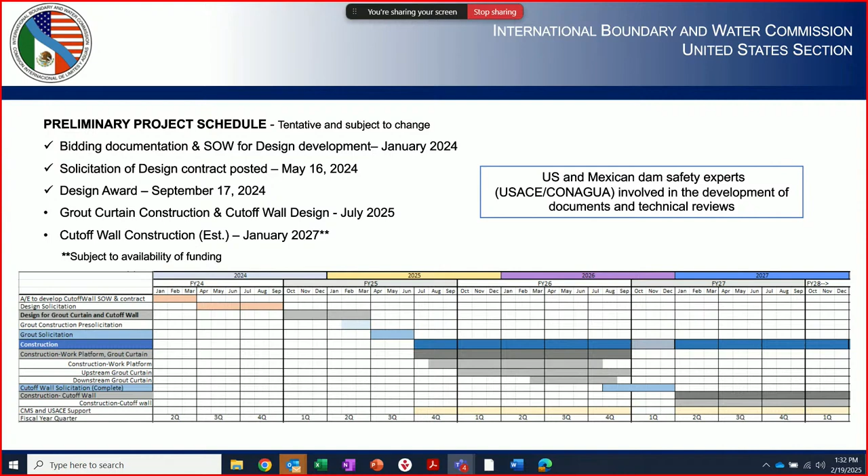How am I doing with time? I don't see the time.

No, okay. To finalize, we have a path forward and some recommendations. We definitely have to finalize the design to determine those specifics for the construction details, to refine our estimated costs.

We are to use existing funding to start the construction of the grout curtain. We need to obtain necessary funding for the rest of the work, such as the cutoff wall section part, and to start that work so we can ensure that the complete composite cutoff wall is built.

And we have a few recommendations: to continue routine monitoring programs of the dams, automated and conventional instrumentation, ensure continuous information sharing between the two countries, and to maintain and update the list of officials identified in the Amistad Dam Emergency Action Plan.

This completes my presentation. Does anybody have any questions?

Is there a maximum lake elevation, or minimum, that the water can rise to during the beginning of the grouting construction in July 2025? So you're talking about pool restrictions. Yes, and that has to be identified during the design, so that's what we're waiting on. It's important to know there's interest in that because we can share that information at the time. The good thing is that even though we just had an inspection on our dams done, there was no reduction in conservation capacity requested so far.

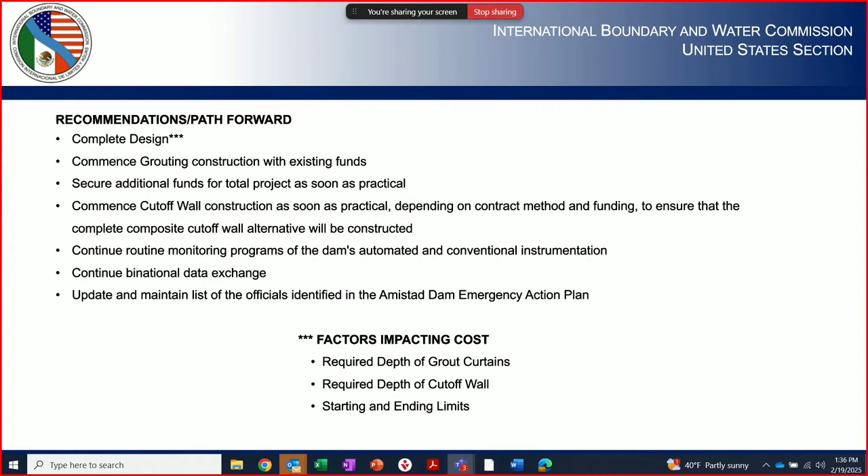Are you going to start this at the deepest part of the dam, or at the shallowest part? Do we have that answer yet? What do you mean by the deepest? So are you going to start next to the river channel? Yeah, like are you going to start on the left or on the right? I'm going to go back.

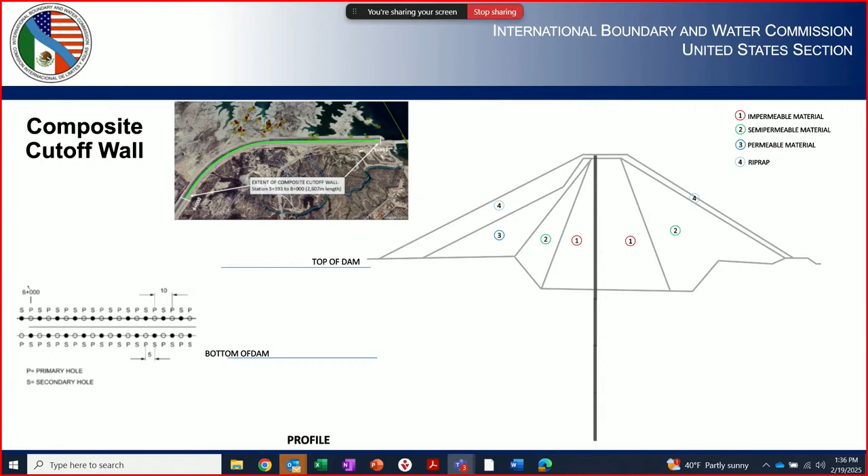Well, I have a map right there, but it's kind of small. So are we gonna start over here where there's no water, or are we gonna start over here where there's more water? Are you gonna start the yellow or the red?

Yes, basically. So the length of the cutoff wall is gonna be this entire length, more than likely, right? Yes, it's 2,600 meters.

Right now the design is being finalized, waiting for it to be done in March, and that design will help us understand how the project is gonna be rolled out. So I don't think we can answer that question yet, because it will be depending on the construction contractor, not too much on the designer. They might give a recommendation, but maybe it's the construction contractor who decides where to start.

So again, we'll share that with you. We're writing down all these questions because that gives us a lot of insight as to what people are gonna be interested for us to be informing the public on. Okay?

They had a question, somebody, Chris, pertaining to the sinkholes. Do you know where the water is going? Is there a way to track it or measure how much we are losing?

So this is right here. We have the sinkholes on the top, on the upstream side of the dam, and then they do pop up on the other side, on the downstream, as a spring. The measurements, we said 2,000 liters per second, and that varies depending on the pool, reservoir elevation.

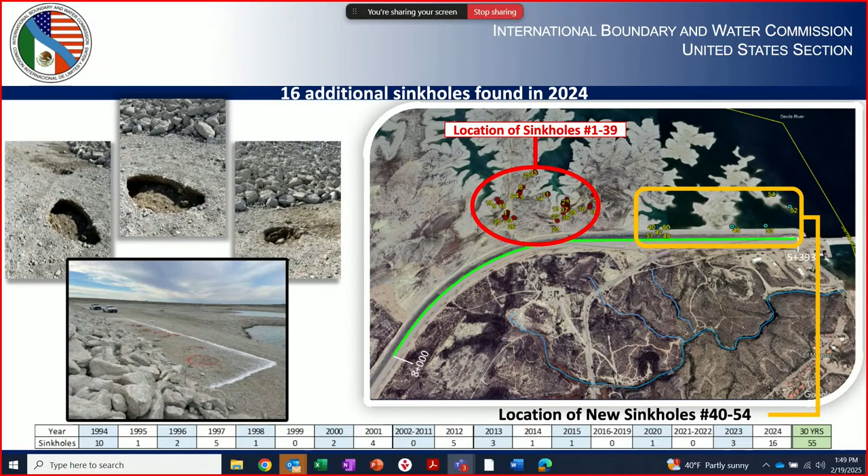Thank you, Commissioner. I have a quick question for the audience: are you guys okay if I wear my beanie? I get cold, and it's chilly today. Thank you. Some of y'all are sympathetic out there.

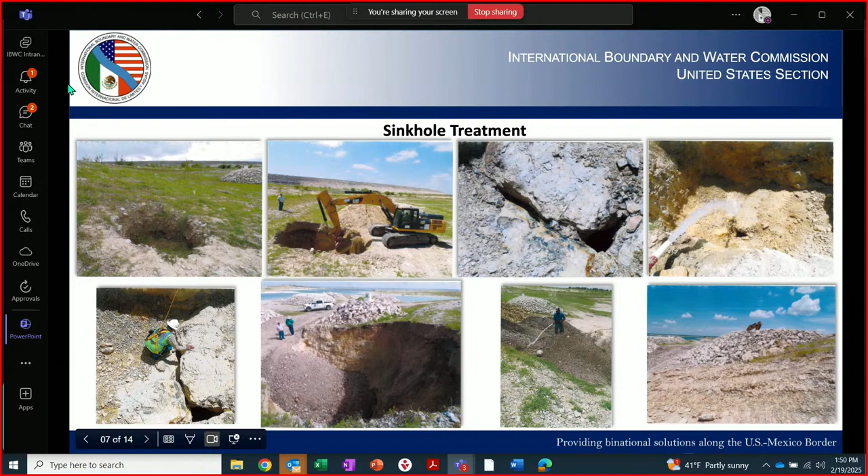Frank, you said the presentations were on here? Oh, downloads? What did you do with my window? I know.

So while we wait for this to come up, I'm a hydrologist in the water accounting division. What we do in water accounting is just what the name sounds like: we account for every drop of water entering the main stem of the Rio Grande and how much water each country owns in the international reservoirs, including Amistad and Falcon. We also support the agency's flood operations and various other hydrology studies.

What I'm going to talk about today is really a story of past, present, and future. By past, I mean recent past. We're going to look at the most recent 40 years and look at inflow trends into both Amistad and Falcon. This is a study done by my friend and colleague, Adrian Cortez, our lead hydrologist at the agency.

Then from there we move into the present. After these inflow trends, and this analysis will end in 2020, the end of the last 5-year cycle, how did that set us up for the current 5-year cycle? Where are we in the current cycle in terms of deliveries and reservoir storage? Spoiler alert, it's not great. Then looking forward, what are we doing moving forward, namely the signing of Minute 331, which just happened at the end of last year, and how we hope to leverage that to increase the deliveries we're getting from Mexico.

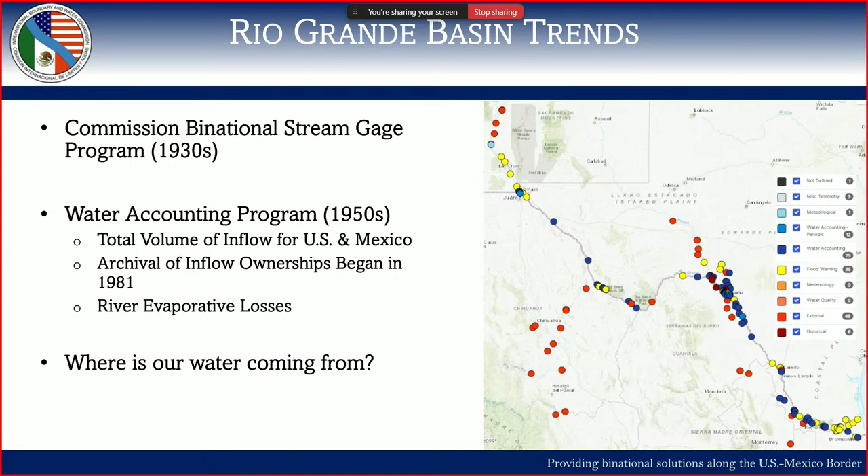So where's our water coming from? Let's start with Amistad. If you're not familiar with the '44 treaty, it spells out where our water comes from, and that's right there on the screen. Off the Rio Conchos, which is right here, we get one third of that water. It comes in from Mexico. That is by treaty. By one third, I mean the water that hits the Rio Grande main stem. Once it hits the main stem, one third of that belongs to the United States by right.

We also get 100% of Terlingua and Alamito Creeks as we move downstream. That's these here, in the Presidio area. And down here is Amistad. We get 100% off the Pecos, 100% off the Devils, and also 100% off of Goodenough Springs. I'm just curious, show of hands, who here has heard of Goodenough Springs? Wow, excellent. For those that don't know, Goodenough Springs is now submerged, underneath the lake. But we do have an accounting process in place to make sure we're still getting our water off those springs.

So now, if you look at this map, there's a whole lot of basin up here, and I just named a few. You can imagine when it rains, it's not just coming down past those measured tributaries. It's also coming in on the unmeasured tributaries. And by treaty, that is split 50-50. That's the last source of water we have entering Amistad that belongs to the United States.

So what do we know from the accounting? I already described it for you. We know the total inflows into each reservoir, and that's ultimately what gets assigned to users in each country. Now, IBWC, we don't control how water is distributed within the countries. We just report to Mexico and Texas, this is how much water you own, and their respective water management agencies will then distribute it to their users.

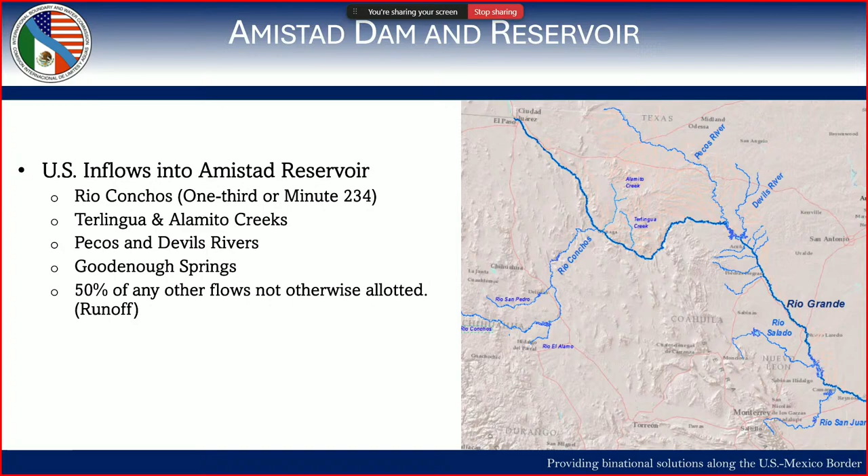What are we doing now that's different? What Adrian did is he took those inflows and split them into their different components. It's an estimate, but it's a great place to start, and it tells its own story. So of those total inflows entering Amistad, how much came off the Conchos as it's moving down and evaporating away? How much actually made it into the reservoir? How about Terlingua Creek, Alamito Creek? We need to understand this problem. To understand it, we need to know where that water is coming from.

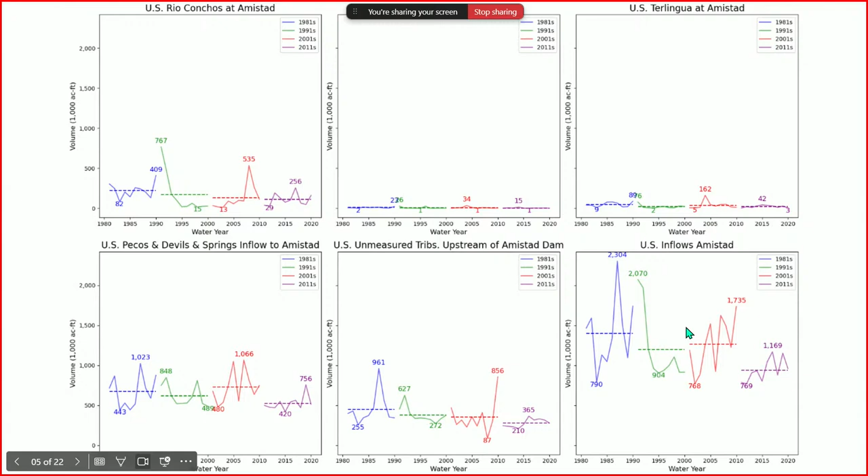Let's get rid of that noise. So what we did here is we took this panel and grouped it into total volumes. We got 4 points, 4 decades we're looking at. This is the total volume of water - 14 million acre feet that we got in the 80s coming into Amistad.

And that's from all the sources of water belonging to the United States - the ones I named earlier: 1/3 off the Conchos, Devils, Pecos, Terlingua, Alamito, and the 50-50 water. And as we track it through the decades, here's where we were 2010 to 2020.

9.4 million acre feet, or 33% less than we saw in the 80s. Why does that matter? Well, as you heard the Commissioner say earlier, our reservoirs aren't holding a 20-year water supply. And what you find in the absence of significant inflows - 2 years, 3 years - there's a precipitous drop in storage. We'll show that to you in a graph later. So having a sustained period of low inflows over a decade,

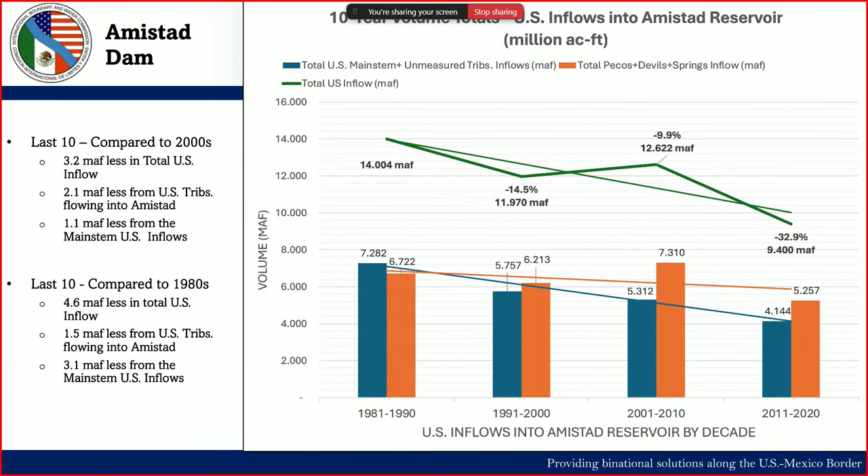well, that hurts. We can split that up into its components. So below each point in the green line, we split it up into the orange and blue bar. Orange is the Pecos, Devils and Spring - that's the water going straight into the reservoir. Blue is what's coming down the main stem from upstream, so the Rio Conchos, Terlingua, Alamito Creek, the 50-50 water. All that is from our accounting.

What's new in our analysis is this graph. We took that main stem water and split it up into its separate components. Now we're starting to learn a little bit more about where this water is coming from. At the top we have our green line again, that's the total water, right? We just saw that in the last graph - 14 million acre feet coming into the United States in the 80s, 9.4 in 2010 to 2020. Let's look at each component.

Let's start with the small ones: Terlingua and Alamito Creek, this dark blue and this purple. They barely register on the radar at this scale. Yes, that's 100% United States water, but it's not a whole lot of water compared to the other sources. Alamito doesn't even show up on the bar chart in some of them.

The light blue, you see my cursor now, that's the Pecos, Devils and the Spring flow. That's a good chunk of water for us. We do see throughout time, if we compare, it's more or less steady, but in the last decade it is lower than the decades before. We have a trend line fit to it, and you can see it's almost flat, but it is descending.

I should take a moment to emphasize the scope of this analysis - it is just from 1980 to 2020. You keep hearing me say those years, and that's important in any kind of trend analysis because it's very sensitive to your starting and ending points. But right now, those are the decades we're focusing on, and it still matters because this 2010 to 2020 is what set us up for the current 5-year cycle, those 10 years of low inflows. So U.S. inflows more or less held steady but declined slightly off the U.S. tributaries.

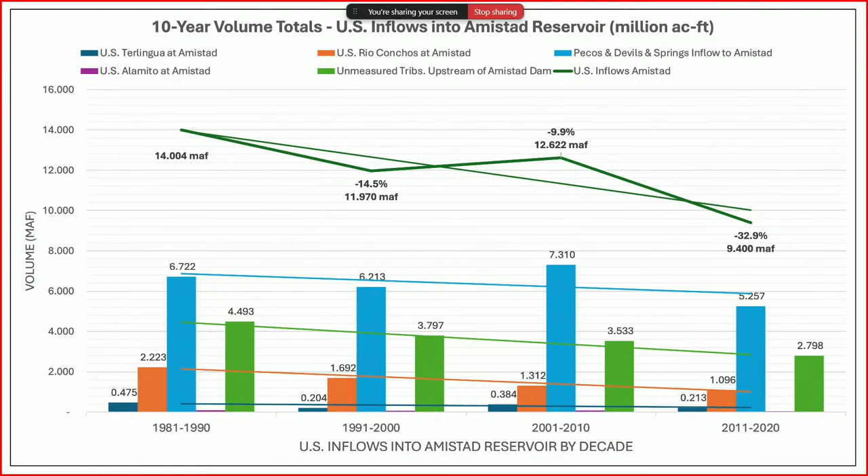What about Falcon? Let's move downstream. If you're not familiar with the treaty, our water in Falcon, we get 1/3 off Arroyo de las Vacas, 1/3 off of Rio Salado, Rio San Diego, Rio San Rodrigo, Rio Escondido. Those are the remaining 5 tributaries that we get 1/3 of the water from Mexico. The United States also gets 100% off of Pinto Creek and San Felipe Creek, which are both right around here.

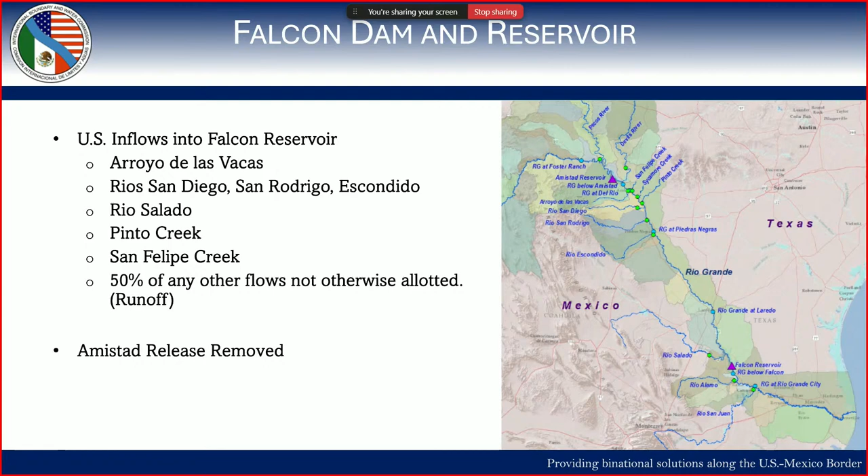And we also get that 50-50 water. Technically, we also have whatever we release out of Amistad going into Falcon, but that effect has been removed in this analysis. Here's the trends again. Let's just focus on the bottom right, that's the total U.S. inflows. And we see the same thing if we compare the most recent decade to the 80s. There's less.

We had this huge spike here. That's Hurricane Alex. That was the last major storm we had that filled up the reservoirs. But you notice right after Hurricane Alex, we didn't have any inflows coming in at all.

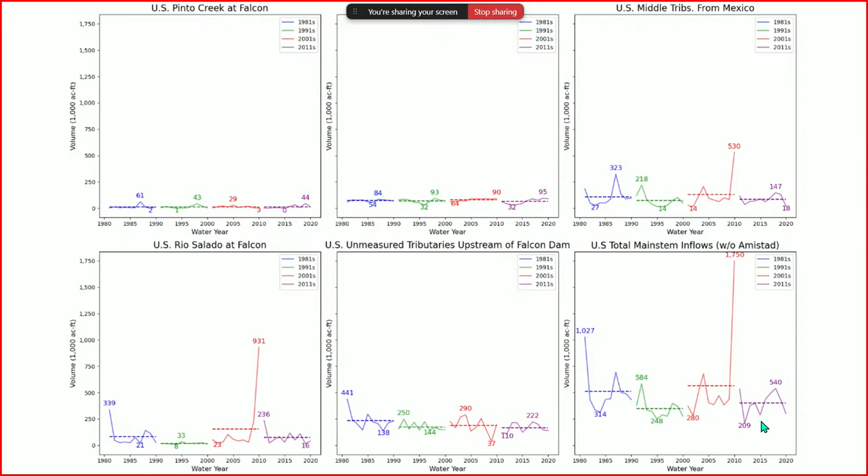This is what it looks like over time in total inflows. So instead of a green line, we have an orange line. Same thing though, 4 million versus 5 million, it's a 21% drop for the United States. So when you ask the question, why are lake levels so low, this is a big part of it. We had a decade of low inflows.

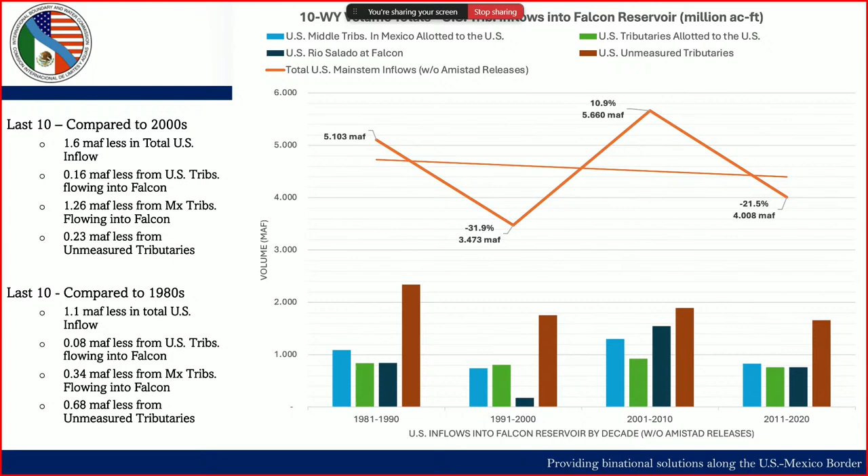In summary, we're looking at, in that most recent decade compared to the 80s, a 33% decrease, which comes out to about 460,000 acre feet annually. From the U.S. tributaries, those are the ones we get 100% off of.

This is for Amistad, so Devils, Pecos. The drop was about 24%. What we got off the Conchos dropped about 51%. That 50-50 water, 38%. In Falcon, the drop isn't quite as big, but it's still there, 21%, or 110,000 acre feet annually. And if you add those two numbers together, what do you get? 570,000 acre feet. Mexico's obligation to us is an average of 350,000 acre feet.

So it hurts to lose this kind of number.

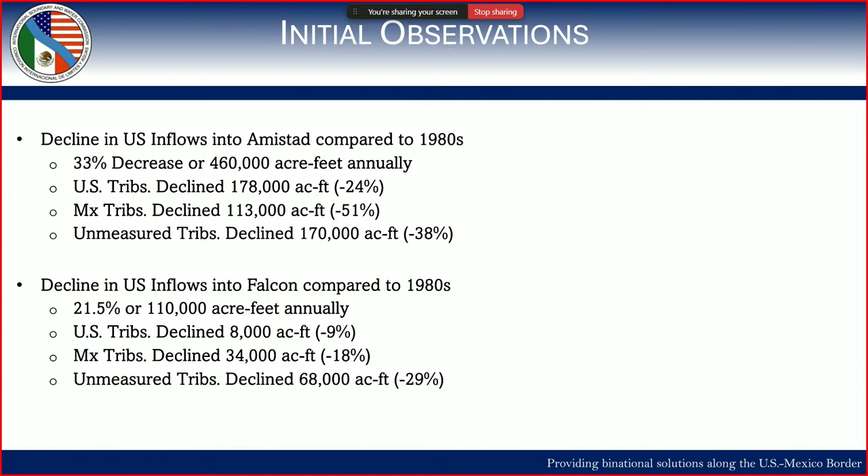Yes, sir. So whenever you're full and you have all that extra capacity, and you talk about not having the influx in there, it looks like you pull the lakes harder whenever you're full. So the change in storage is a factor of two things. To repeat the question: when we had a high amount of storage in there, it looked like we were pulling the lakes harder.

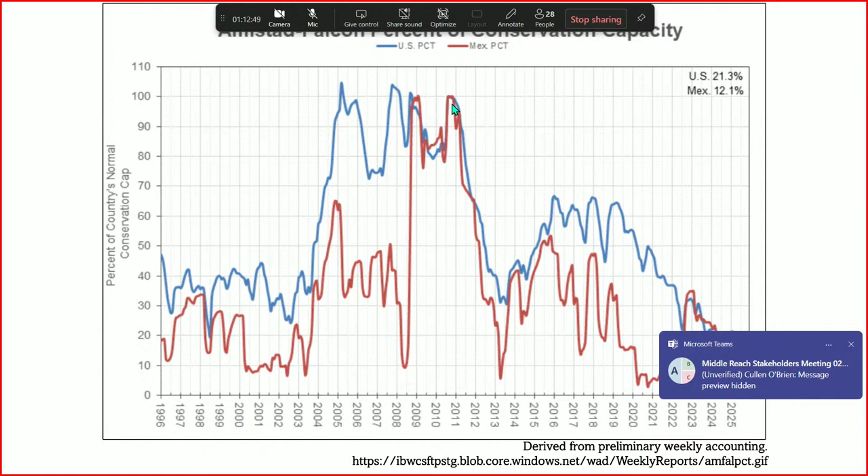And if you were in the lower valley, I know Anthony, you were there, you heard me say this, but this is something that really hits home for me. My second son was born in 2010, and he made it to high school without us having full reservoirs again.

So this is what prompted us to look at that inflow. Why is it this way? We wanted to spark a discussion amongst our water managers. So any questions on that? I've been throwing a lot of graphs, a lot of numbers at you.

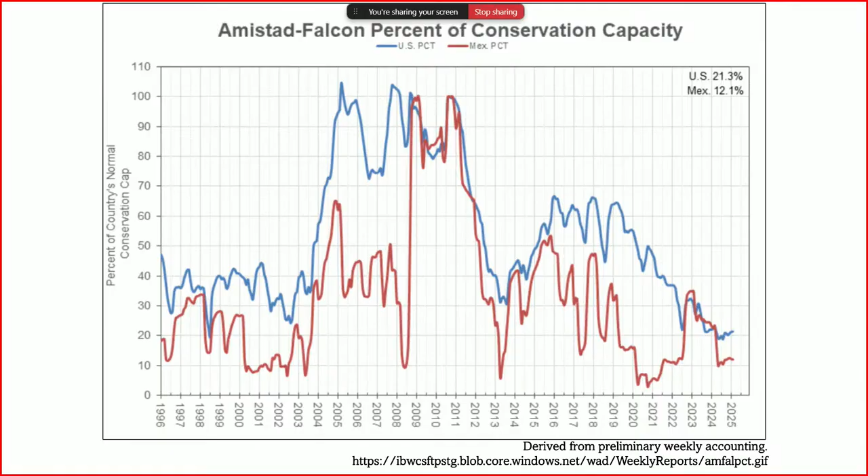Okay, how does this look in terms of deliveries? So if you're not familiar with the 1944 water treaty, the way it works is Mexico's delivery obligation on the Rio Grande is 1.75 million acre feet over a 5-year period, which comes out to an average, keyword average, of 350,000 acre feet a year.

So if it's wet, we get more. If it's dry, we get less. But ideally, we hit at least an average of 350,000 acre feet a year. There is no maximum obligation, just a minimum. We just get one-third of the water off those six named tributaries.

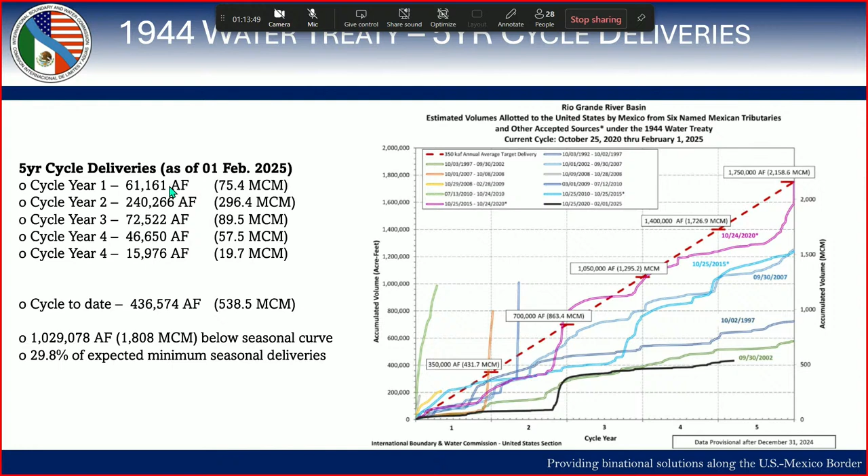On the graph right now, if you remember, that inflow analysis ended in 2020. The current cycle started 2020. So cycle year 1 here that's on the screen, that's 2020. Cycle year 2 is 2021, and so on. Oh, this should say cycle year 5 at the bottom. And when I say 2020, it started in October 2020, so it's October 2020 to October 2021.

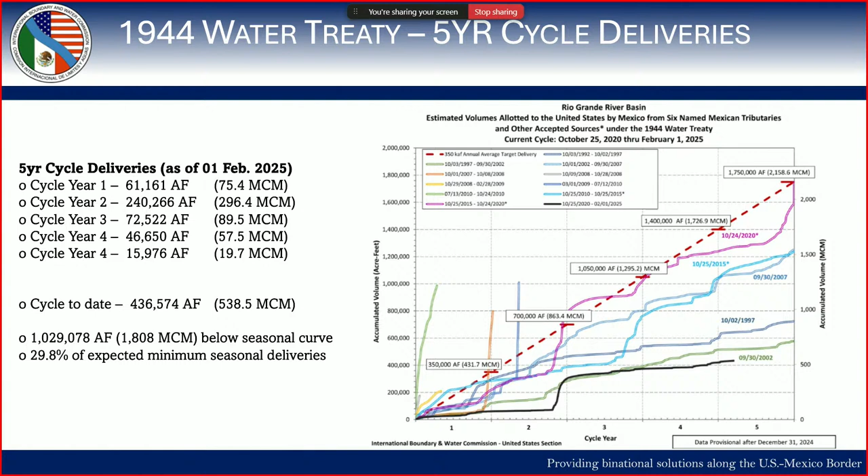None of those years are over 350,000 acre feet. None of them. And that translates into us only getting, to date, as of February 1st, 436,000 acre feet, more or less. We are 1 million acre feet below where we would like to be at this point in the deliveries. We're at about 30% of that target.

And if we compare it to other cycles, that's what this graph is. This is a graph we also update weekly on our website. On the y-axis, we have accumulated delivery from Mexico in acre feet. On the x-axis, we have cycle year, 1 through 5. There's that 1.75 million acre feet in the upper right. This red dashed line represents the rate at which we should get deliveries if it were delivered at a constant rate to meet the minimum. Each of these lines represents deliveries in a different cycle.

And you can really split this graph into two parts. You got lines that make it all the way to the end and lines that don't. These lines that don't make it to the end—if you don't know, there's a clause in the '44 treaty that says if United States capacity fills up in Amistad and Falcon, we reset the year. There's nowhere to store that water, so we reset the cycle year, and all debt is erased. That's how the treaty works.

But if we don't reset and we run the full 5 years, and Mexico does not meet that minimum obligation up here, the treaty says Mexico has to make up that debt they owe us in the next 5-year cycle and still meet that 5-year cycle's obligation as well.

You can imagine if you're in a period of prolonged drought or prolonged low inflows, and you didn't have enough inflows to pay off the first obligation, it's going to be hard to pay off that debt and the second obligation with just one-third of those six tributaries.

So what we did is we signed an agreement in the 60s, Minute 234. Minute 234 is in recognition that, hey, that could be a problem. So if a cycle ends in a debt, and only when a cycle ends in a debt, the United States can take more than its one-third share. Maybe we get two-thirds of Rio Conchos, maybe we get 100%. That's a commission decision they make.

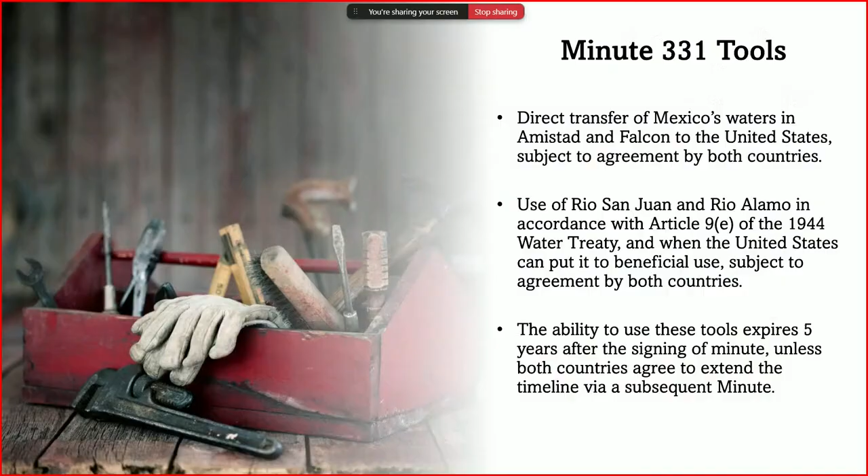We are so far in arrears right now, 1 million acre feet. If we go back to that graph, the black line is the current state of deliveries. It's not just far in arrears, it is the worst we have on record going back to the 90s.

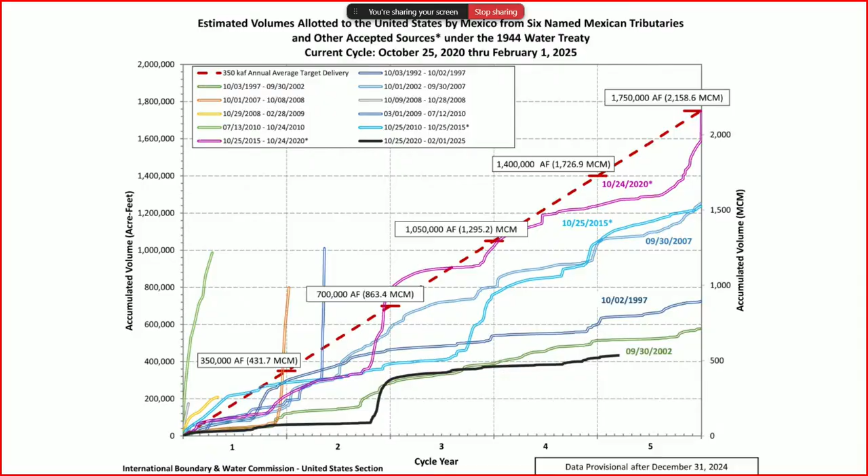Oh, I got out of this. Well, let me look here, I got a question. Which one is it, Frankie? No, Shauna has a question. That's the city manager, Shauna.

As in Wichita Falls, Texas, they're doing reintroduction of their effluent off their sewer plants into the aquifer. Are other cities along this region looking at the same thing? I would think it would probably negatively impact the flow, but it keeps it more local.

I don't have any personal knowledge of any projects like that. I don't know if you do, Commissioner, but the vast majority of the cities along the border are primarily focused on desal as a diversification method. That's the latest state water plan that has been looked at, but beyond that, I have not seen anybody. It doesn't mean that they're not considering it in this state water plan.

There's just millions of gallons that go downstream every day because of runoff and effluent discharge off of sewer. Right now, many of those sewer plants are discharging into the river already, so they could already be in the system, but any new sources I'm not aware of at this point.

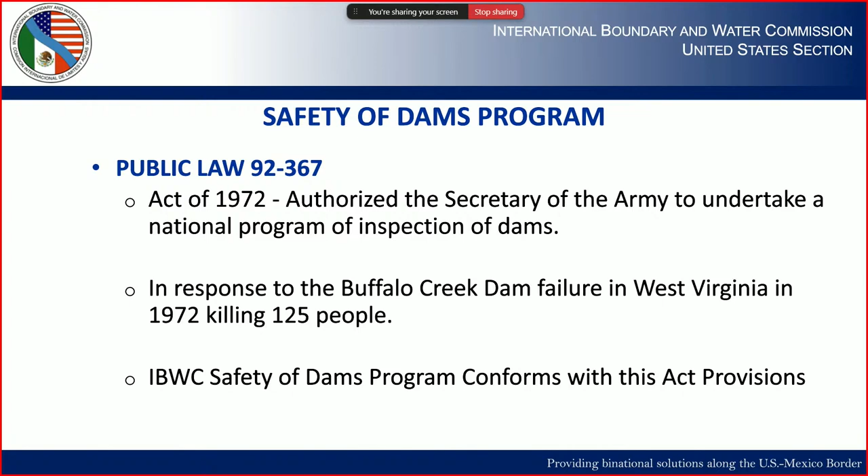So under the Safety of Dams program, it was authorized under the Secretary of the Army back in 1972. This was in response to a Buffalo Creek Dam failure back in West Virginia in '72 that killed 125 people. So our IBWC Safety of Dams program follows these guidelines. The United States Army Corps of Engineers, it's more properly known, falls under the Secretary of the Army.

And we also follow the guidelines of FEMA that sets guidelines for dam safety. Given the international aspect of our dams, there's also international inspections that we carry out. So the U.S. sections and the Mexican sections get together for periodic inspections. We bring in our experts. Our experts on the U.S. side will be the Army Corps of Engineers. Sometimes we also bring in the Bureau of Reclamation. And Mexico brings in CONAGUA, which is a federal agency that oversees most of the dams in Mexico. CONAGUA stands for the National Commission of Water, and CFE, which oversees most of the power generation on the Mexican side.

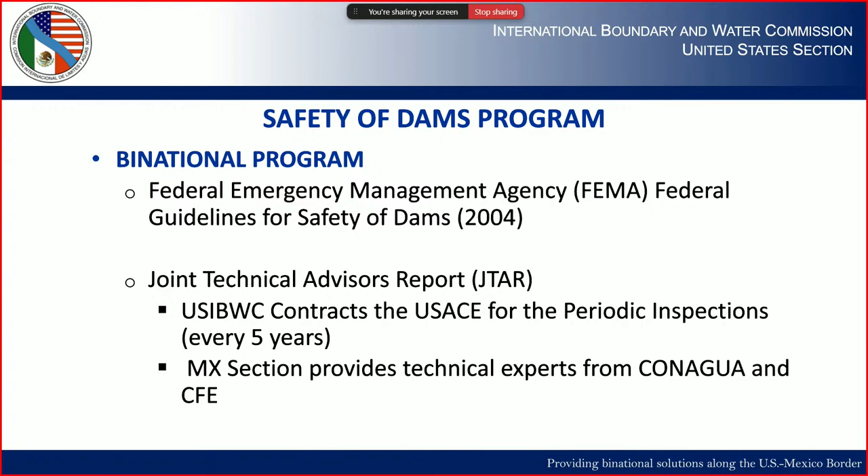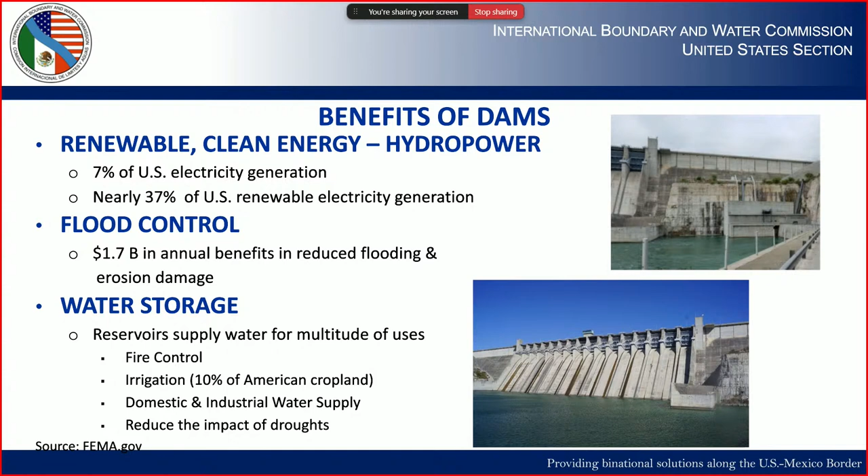Benefits of dams: well, the hydropower part gives us an opportunity for renewable and clean energy. And a big benefit is flood control and reducing flood and erosion. It protects property and lives for any of the people that live near these floodplain areas. It also gives us an opportunity for water storage, and it reduces the impact of droughts. And something very familiar here with a lot of people in the area is, of course, navigation and the recreation area.

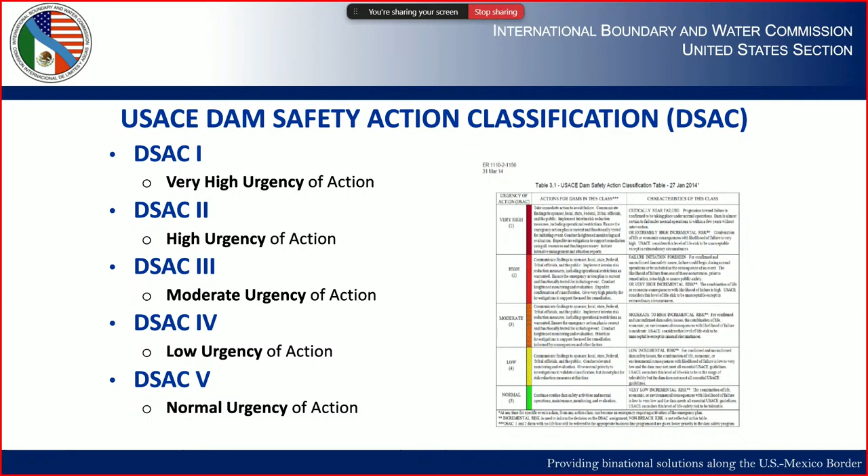The DSAC, the Dam Safety Action Classification, there are 5 ratings we've adopted here, and it comes from the United States Army Corps of Engineers. Just remember, the lower the number, the higher the urgency. The higher the number, the better off you are. Under our portfolio of dams, most of our dams fall under DSAC 3 and 4. There's just one that falls under DSAC 2. Anybody remember which one that is? Yep, it's our Amistad Dam.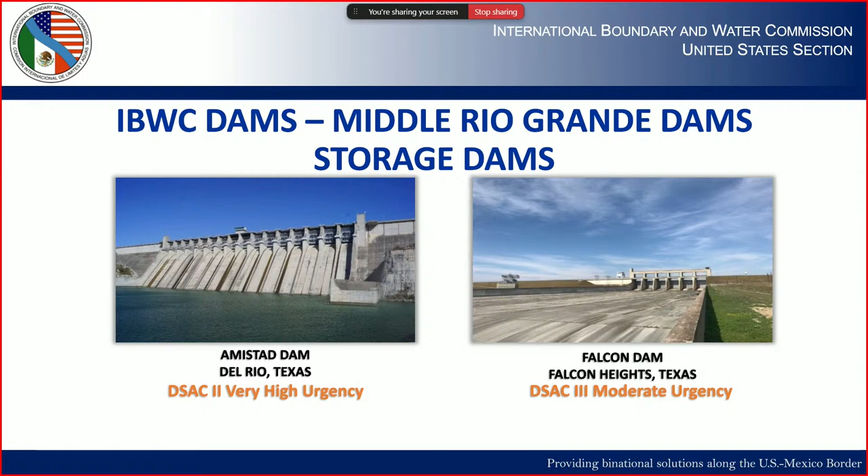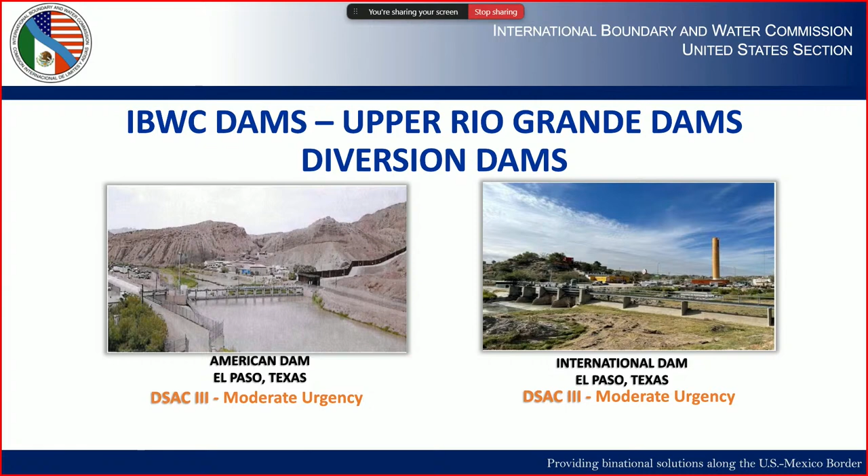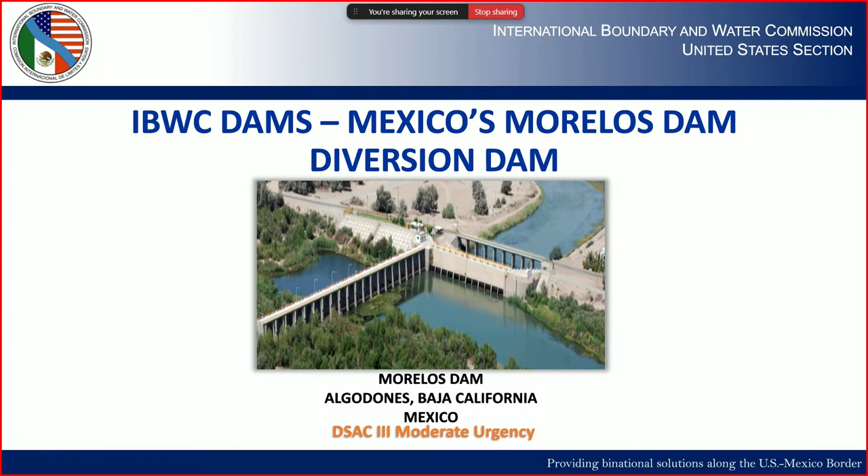So Falcon down lower is a DSAC 3. These are dams in the middle stretch of the Rio Grande, and these are our only 2 storage dams. We also have other diversion dams that divert the flows within the river. Here's a brief overview of those dams and their DSAC ratings. Down lower, we've got Anzaldúas and Retamal Dam with their DSAC ratings, and Morelos Dam, which is in Mexico.

The type of inspections that we carry out, we just recently carried out under our Safety of Dams program, we bring in the Army Corps of Engineers. It's 5-year inspections that we carry out, and they're very detailed. They look at our steel structures. They ask us to operate our gates while they carry out some of the mechanical and electrical tests that they perform. They get underneath our bridges to inspect them.

And then, given the international aspect of our dams, we also bring in our counterparts from Mexico, and they bring in their technical experts. Once these inspections are carried out, they prepare reports and give us a list of recommendations that they expect us to act on, so we can plan accordingly.

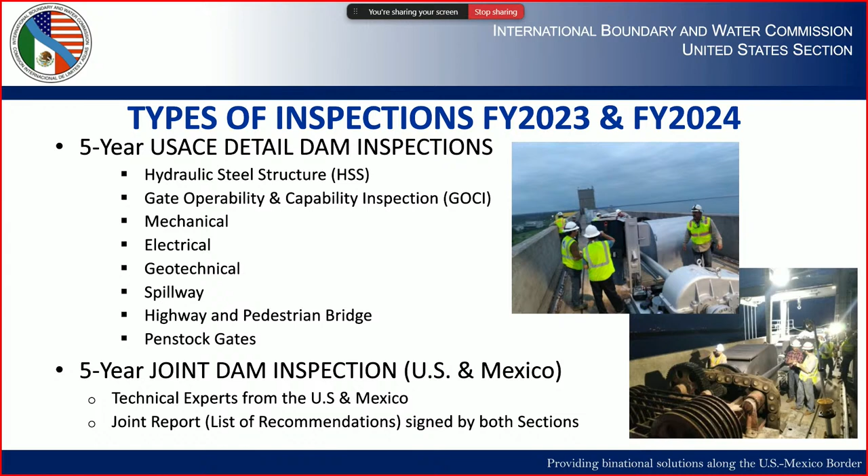So this is the result of those inspections and those reports. This is for the Amistad Dam. You can see some of the O&M, some of the smaller items we can carry out with our local crew, but some of them we have to plan out as we gather resources. The O&M work plan on the top right corner shows how we plan them out for different fiscal years, and the bottom right shows the capital plan for future years. There are also studies that they recommend, and some training that, as they review our staff, they tell us would be helpful.

They also review our workforce. I don't know how we got by without an electrician, but we did, though they're recommending an electrician, an engineering tech, a maintenance mechanic, and a maintenance worker. And you can see the list, it's a long list, 114 recommendations, and that's a big cost also.

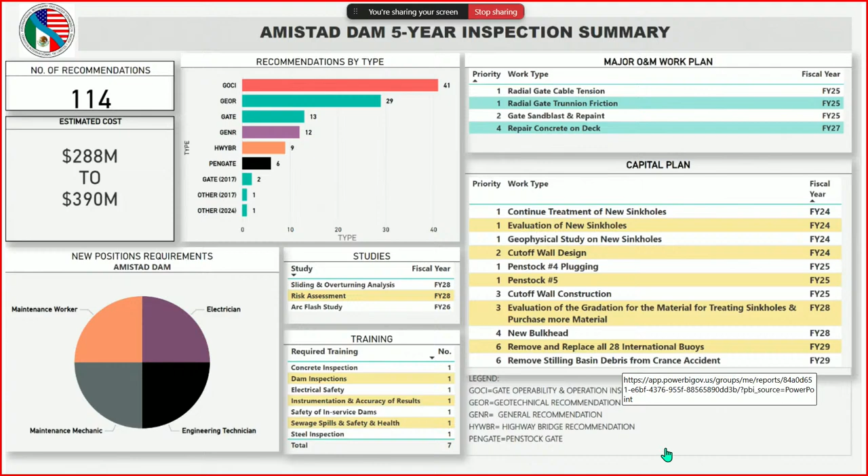Here I'd like you to notice that at Amistad, while our dam is a little younger, our power plant seems to be doing well. Our dam, well, not so. At Falcon, our dam seems to be doing a little better, but our power plant needs more resources that we have to invest in. There's also a different rating cycle that the Corps does for the power plants.

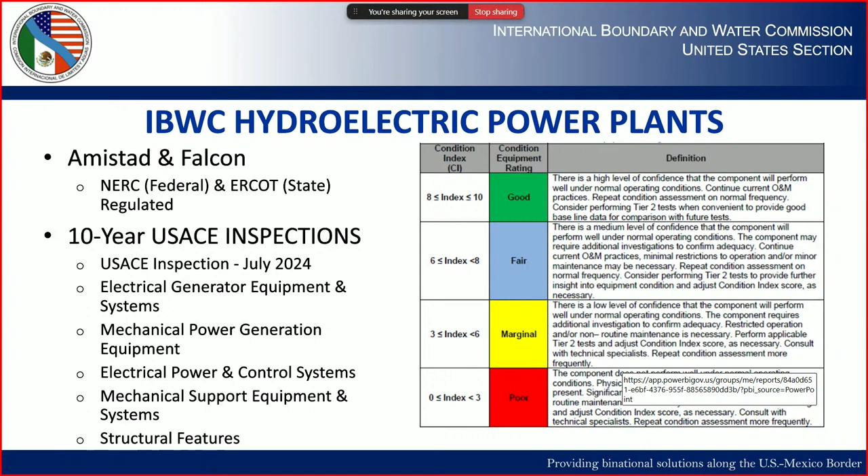We are regulated, and we follow state and federal regulations. They break down each of our components and they rate them and evaluate them.

And some of the exciting work being carried out at the dam and the power plant, Mr. Evelio will cover. Thank you, Mario.

I'll take over here before we get any other questions. I just want to inform the stakeholders here in this region what the Amistad Dam field office has done, what they've accomplished in 2024, and what's to come in the following years.

A brief overview: accomplishments, some heavy equipment acquisitions that we acquired here at the field office, the inspections that Mr. Mario Gomez just mentioned, I'll show some pictures here. Inspection recommendations given in the prior 5-year inspection, 2025 capital projects, deferred maintenance projects, in-house work that we've done and will continue to do, and power plant capital maintenance projects, and preparing the region for the 2025 flood preparedness.

Of course, everyone notes here that the lake is 66 feet below conservation level, but due diligence, we need to be prepared at all times.

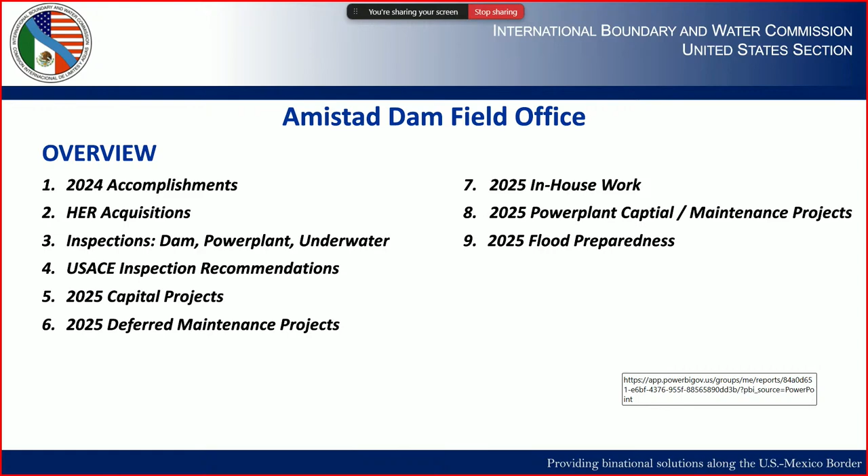So I'd like to start with those who have not been to the Amistad Dam infrastructure, to kind of gauge what we actually do for operations and maintenance here at the dam.

For starters, we have 2 generators, each with a capacity of 33 megawatts. We have the dam concrete section with the control building in the center, which both Mexico and the U.S. use to do flood operations from. We have 4 miles of dam embankment, 2 miles, but once you add both sides, upstream and downstream, it adds up to 4 miles of doing maintenance and vegetation control on the embankment.

We also have 8 radial gates that we maintain and operate and make sure are ready for the flood readiness plan. Along with those radial gates, we have 8 stop logs that we use to do any maintenance if the conservation level was being met at the time.

We also have 5 penstocks with the associated mechanical gates. We have 4 head gates, which are roller slide type with a cable hoistway system. We have 2 irrigation gates, 1 hydraulic, which those who attended the site tour this morning realize the extensive repair that's needed there, and then 1 roller slide gate in conjunction with the bulkhead that's used for all 5 penstocks to do any maintenance.

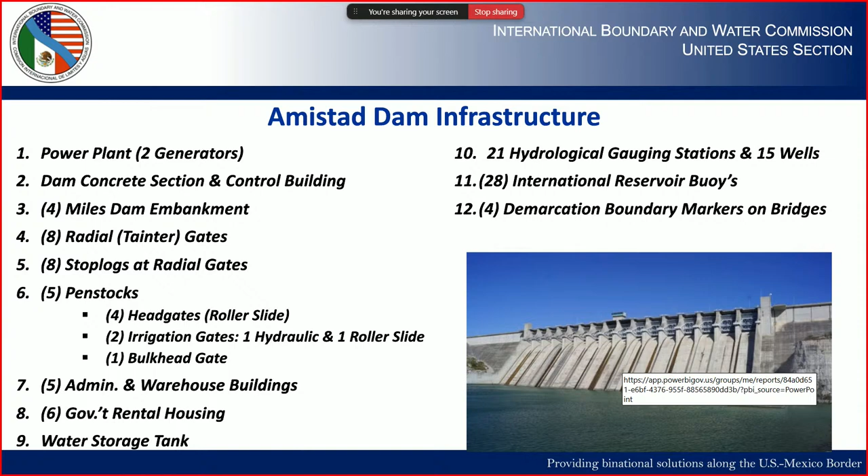So 2024 accomplishments, a list was given out prior to the meeting, and I'll just briefly state these. During this past year, we were able to replace a catwalk with in-house staff. So it's a great accomplishment because now we're able to lubricate and grease the last radial gate, number 8, which had not been in operation for quite some time.

We implemented repairs and replacements based on the 5-year recommendations. Every 5 years we do this inspection, and what's been seen is we're only able to accomplish a certain amount of recommendations throughout the 5-year cycle. So plugging away and getting ahead of those were very good accomplishments from our staff.

We performed the major inspections with the Corps of Engineers and CONAGUA Technical Advisors, which is a huge accomplishment. We also performed maintenance on water conveyance projects, which is 50 miles of hydrological gauging station road work, very important for our hydrotechs to get out to these remote sites and do precise measurements for our water accounting division.

Also, ongoing rehabilitation, which is not completed but is set to kind of complete towards the end of February, is the rehabilitation of the wicket gate seals and the runner cone system for the power plant. Once that's completed for generator 1, we will continue with generator 2. So, like I mentioned, all these were accomplishments. A great round of applause for our staff from the Amistad Dam Field Office and Power Plant.

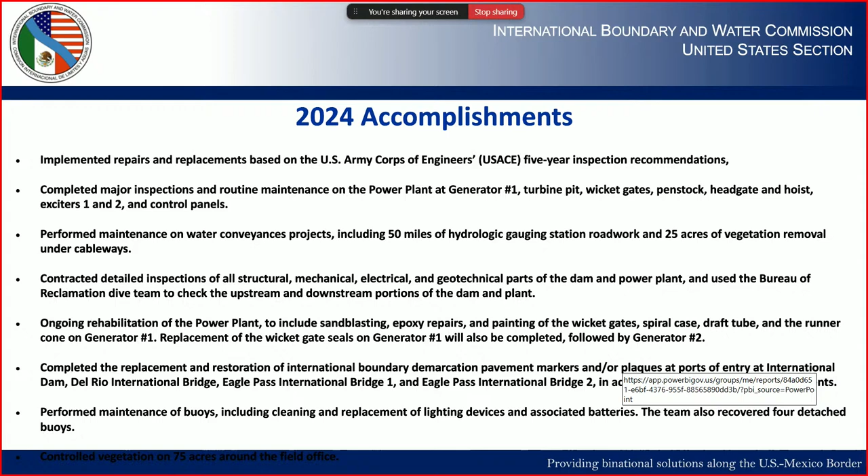So we accomplished a lot of this road work and vegetation control due to some of these heavy equipment replacements that weren't installed, I believe, when you were enacted as commissioner. So Commissioner, thank you for this D6 dozer, the water truck, and the dump truck, which helped us achieve these goals. Thank you.

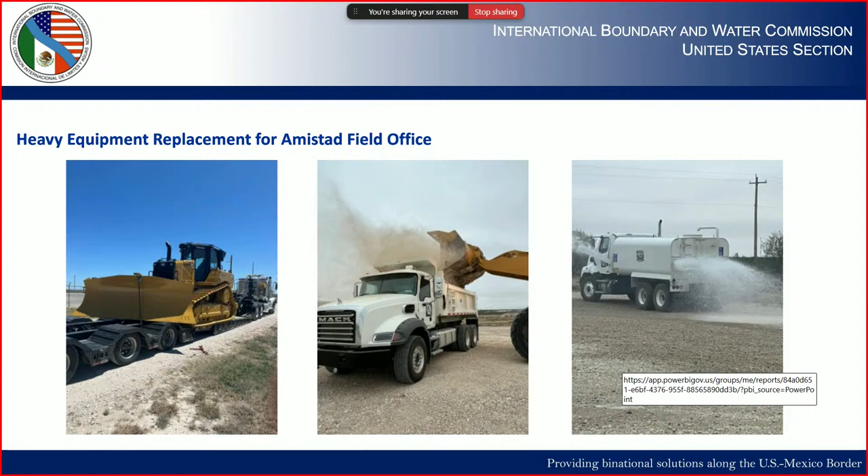2024 accomplishments. A lot of these repairs and replacements have been happening on the radial gates. A lot of these mechanical components are getting to their limit, not necessarily the mechanical component itself, but the components within the actual gears, gearboxes, angle back boxes. So what we're doing right now is having our mechanics break these components apart, replacing gaskets, bearings, relubricating, things that hadn't been done in a while.

As we do that, we find out that even though the inspection said you need to do this and this, we actually have to go a step further in repairing these components. The first line of photos shows how our mechanics start working throughout the phase of those mechanical rehabilitations. At the end, you'll see the gearbox, or transmission box, fully rehabilitated with new corrosion coating, new bearings, gaskets, and new oils.

The bottom photos show the gauging stations, road work, and vegetation control. As you can see, these are in remote areas. It takes about an hour, hour and a half for our heavy equipment operator to get out to these remote sites, and they're not easily accessible roads. There are winding roads on cliffs, so maintaining safety while doing this type of work is paramount.

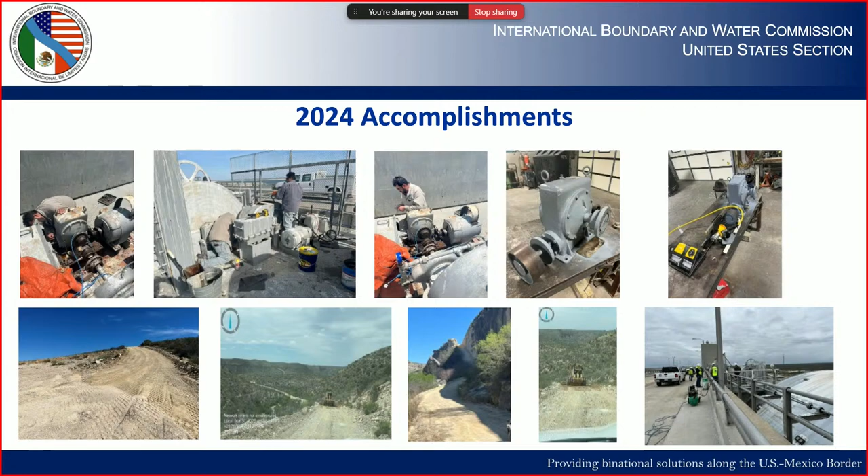That's another huge accomplishment. These additional photos are other maintenance items that we do at the dam. For example, the first two pictures show our penstock gates, which are the roller type with chains, where we do maintenance, bringing them up and rehabilitating them by re-lubricating the rollers and chains, making sure there are no structural deficiencies. The third photo shows our crane operators.

Setting up the necessary weights needed to do any crane work. For example, on this occasion, we prepared this crane to do a bulkhead lift for our penstocks.

The next two pictures show our D6 dozer being put to use, doing some vegetation removal at the cableway. The bottom pictures show our reservoir buoys. Out of the 28, we have 18 still attached within the reservoir pool. 10 of them have become detached due to the fluctuating levels of the lake, so we do have a capital improvement plan to get those replaced soon. And the last picture shows the ceramic markers placed at the international bridges and our dam.

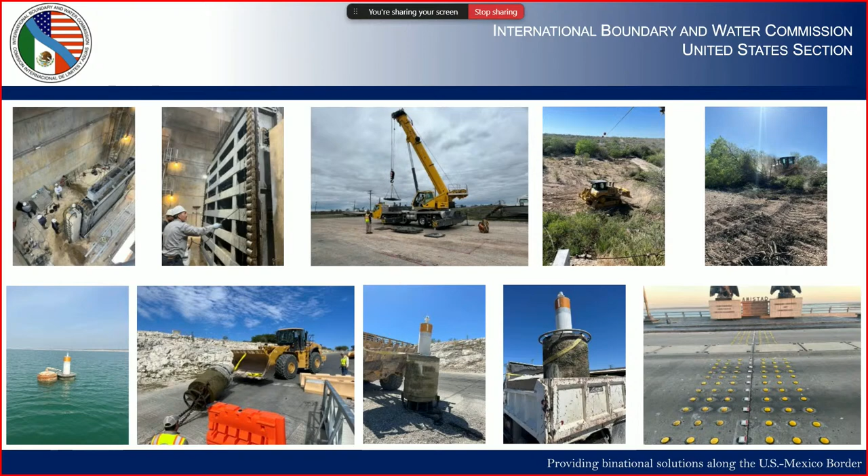The Amistad 5-year inspection, which Mr. Mario Gomez touched on, these pictures show when the Corps came out here. They did some rappelling to do the structural investigation on each of the gates, both on the Mexican side and the U.S. side. They also looked at the gate operability to make sure they operate, open and close properly, and looked at our penstock gates to make sure those open and close efficiently. Here are just a couple of pictures to show what that inspection entails.

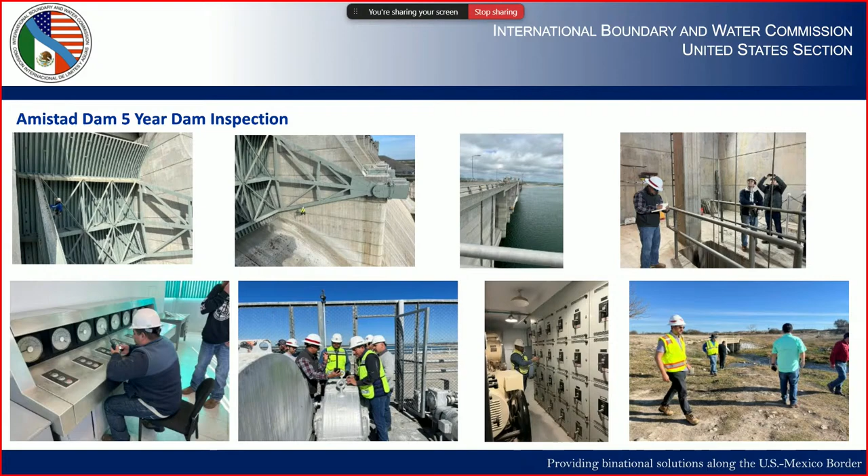Also, on the accomplishments list, we did do an underwater inspection provided by the Bureau of Reclamation. They looked at our spillway basin to make sure all the concrete within that basin is still intact, and on the upstream side, the water intake structures, to look at those trash racks, that they're not deficient in any way possible.

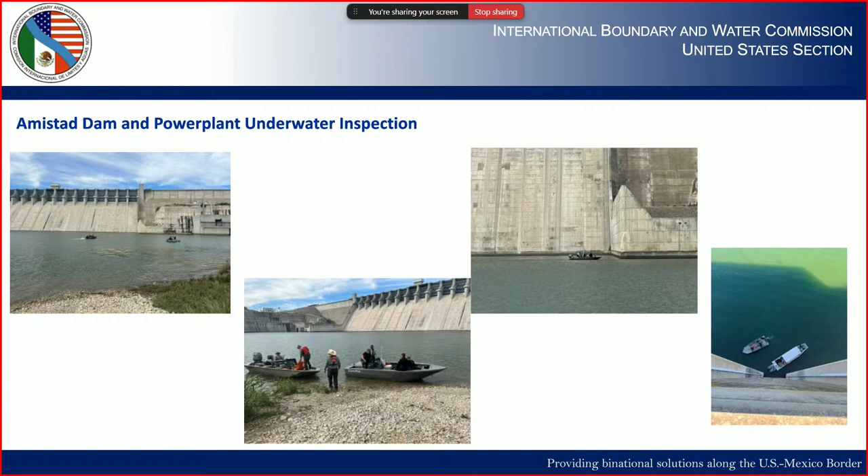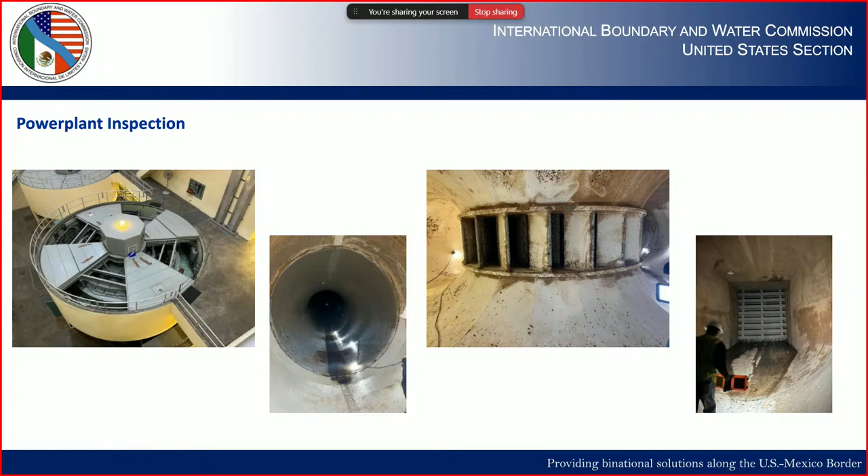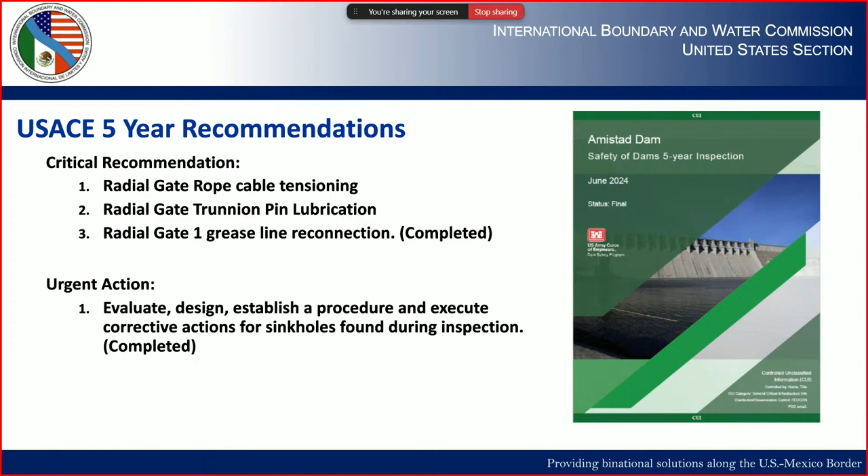For the 5-year recommendations, the critical elements were: make sure our radial gates' cable tensioning is corrected, the trunnion pin being lubricated, which we're in the process of executing. The radial gate 1 grease line reconnection, which has been completed. And as Karla said, the most urgent action is to get this rehabilitation of the sinkholes project completed, which is ongoing right now in design.

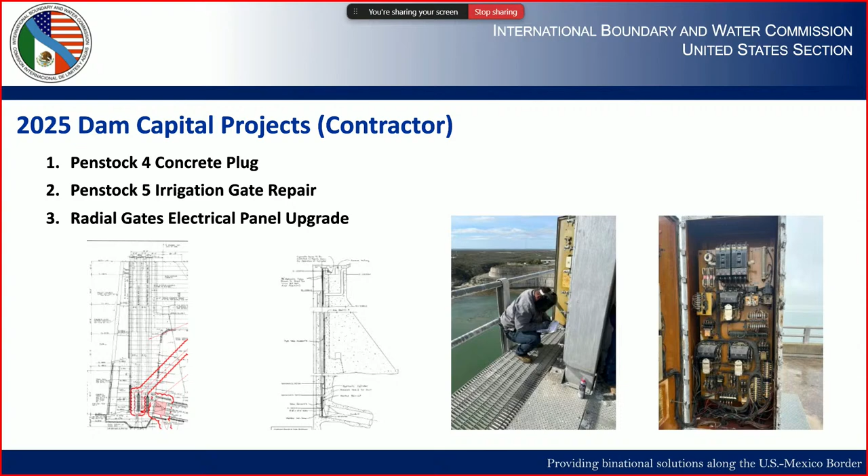Radial gates electrical panel upgrade - that's something that was listed on the recommendations, and it's needed immediately as well, and it's also a capital project improvement.

Deferred maintenance. So one of the projects listed on the recommendations, even though as an agency we've been aware we need to catch up on some of this deferred maintenance, is the radial gates sandblasting and painting, seal replacements, anode replacements, and the cable tensioning comes up again.

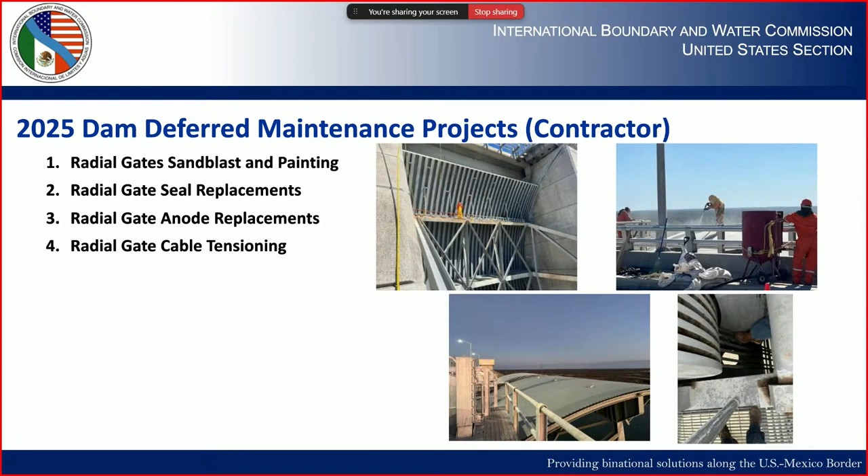Dam in-house projects: continue with the mechanical hoistway components rehabilitation, do the trunnion pin inspection and lubrication, which we'll use in-house staff with our crane for. The radial gate U-bolt inspection and lubrication, which is on the back side, upstream side of the gate. Continue routine maintenance, road work and vegetation removal at all the hydro stations, buoy maintenance, and the boundary demarcation markers maintenance, along with all the other routine maintenance requirements needed for the dam.

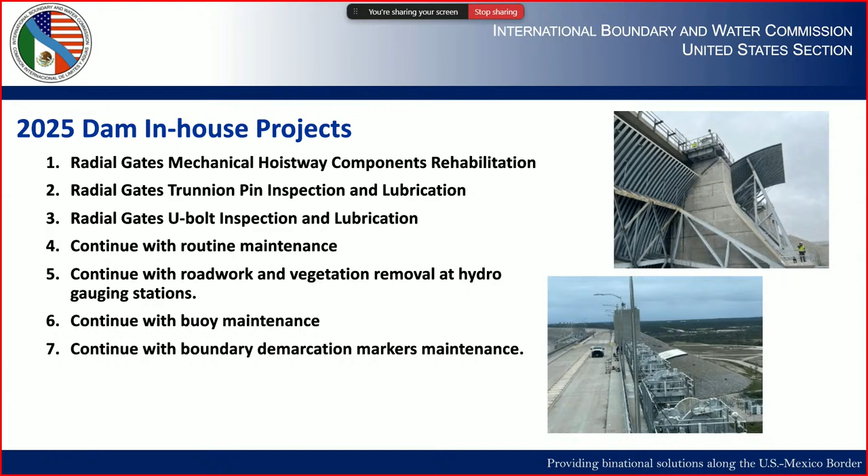Power plant capital projects: like I mentioned, we're doing sandblasting and repainting via contractor for these wicket gates and the squirrel cage. We will continue on to generator 2 once generator 1 is completed.

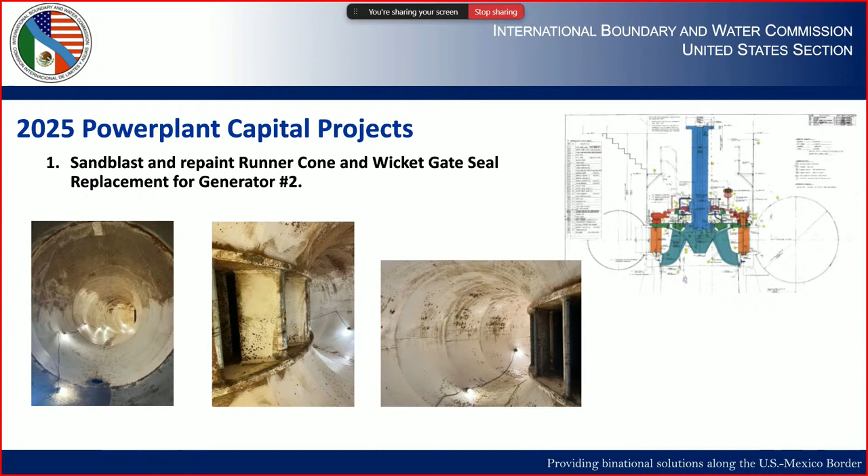Any questions for me or Mr. Mario Gomez? Yes, ma'am. With all of the maintenance and repairs that are being done, how is it that we still have 114 recommendations? Or how is it that we've got to this point where our dam is in a more dire situation than the others?

Right, so a lot of the recommendations that were coming up is that the dam is 55 years old. We've done the routine, recurring maintenance, but we're getting to the point where we need to do replacements, capital improvements is what's needed there at the dam. That's what a lot of these recommendations are coming and telling us needs to happen.

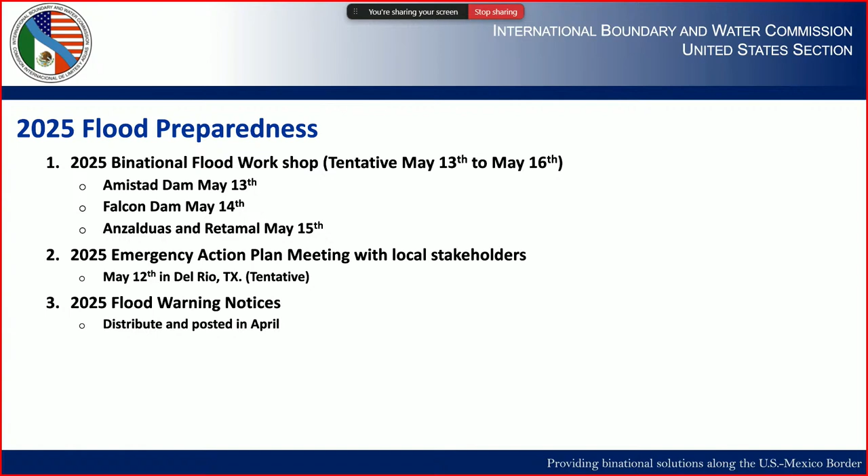Thank you for the troopers that stayed the entire two hours, I hope you found this informative. We will have another meeting around the time to update the group on the construction. I was really impressed with the quality of the questions that came forward. I love coming to these meetings because it sensitizes me to the issues going on. And those people down in South Texas worry about their water supply, but I need to worry about the lake as a public amenity out here too. I think it's really important for us to be cognizant of that. So thank you for bringing up those questions.

It says, would it be possible to get a town hall meeting with IBWC and Park Service to update the public on outlooks and plans? We'll follow up on that. And, excellent presentation, thank you for the continued great work. Thank you all for attending.

Okay, you need to leave. You need to take this gentleman.